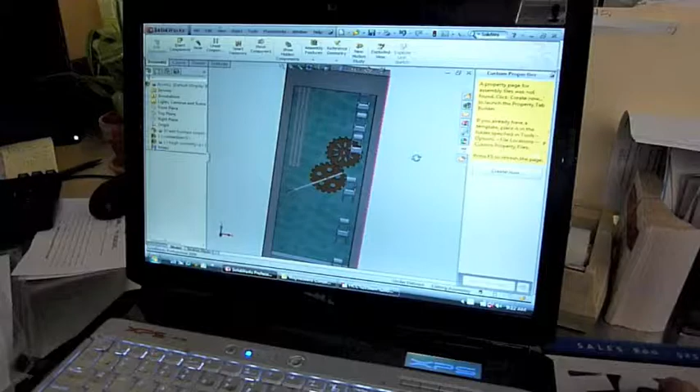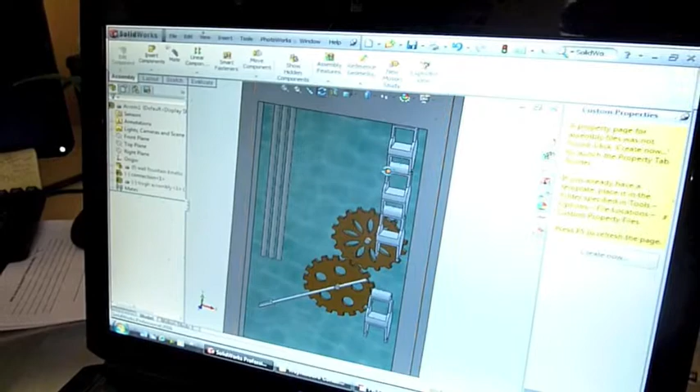Alright, so this piece right here will be flowing water in a linear form. What they'll be doing is filling up a canister that's attached to a counterweight on this shaft, which is spring-loaded in here. That will turn these gears, and the gears will then have this piece up here that will actually be water troughs rolling down constantly, smaller than what you see here, scaled to size. That will be kind of a conveyor.

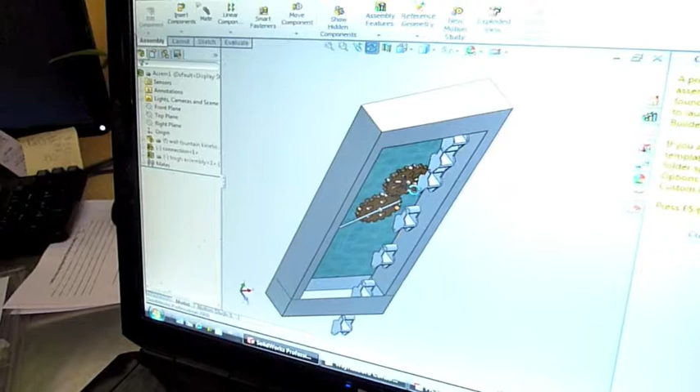And as the water's coming here and the counterweight's coming off of this piece here, it'd be moving these pieces slowly up and down as they're filling with water the whole time. They're filling with water because they're basically going to be dunking in, coming back up with it. And as they come up, they're going to pass this gear and counterweight, letting it move and catch up.

So the rod with the water coming down will be working in tandem with these pieces here, letting it flow without any other movement. It'll just be the water weight working it all together. So the water's driving it. Yeah, the water will drive everything.

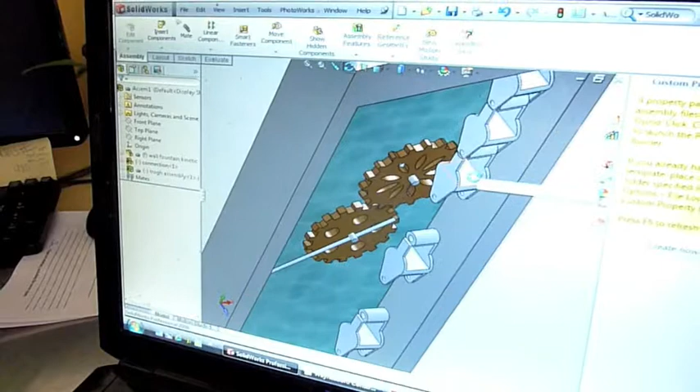Where does the water first enter through the rods? These pieces right here, that's where the water's coming into the system. It will actually pick up water from down at the bottom trough, and it'll come out with the water in it. And as they go up, they will.

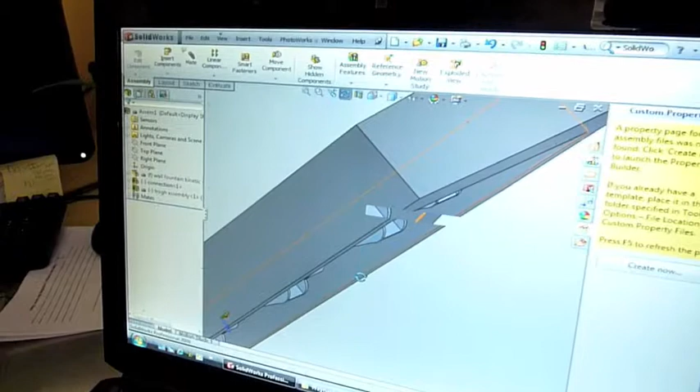Let's see if we can match it. See if it'll move, but you can't really see. Well, it will attach to a piece that's on this gear. And as it goes up, they're constantly going to be moving it, and this is on a spring.

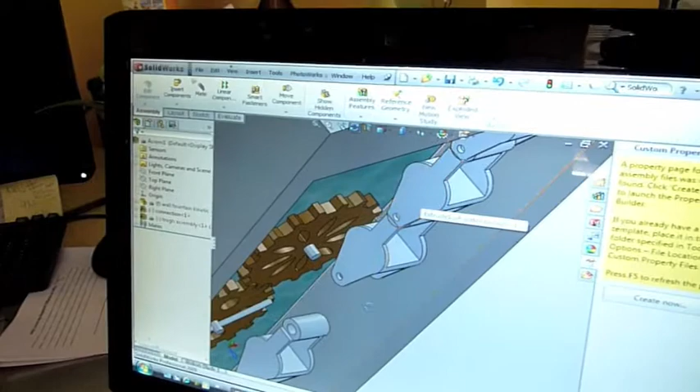So the spring loads up with tension and water weight on the other side, then it'll push it down. That will then make these things jolt and have them stop the other way, and then the water weight will keep it moving. So you'll have movement up and then movement back down.

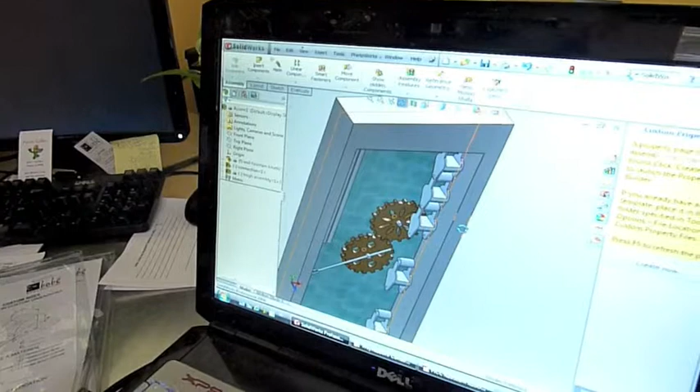As these pieces here are running in a loop, and they come back up filled with water and their water weight, they're going to be run by this gear, a separate pinion gear that's continually running this off of the weight here and spring loaded. Depending on how it needs to work in tandem with the weight and the mechanics of it, I might add a DC stepper motor to the back of that gear, and that will basically start it up and get it going, and then the water weight should carry it along.

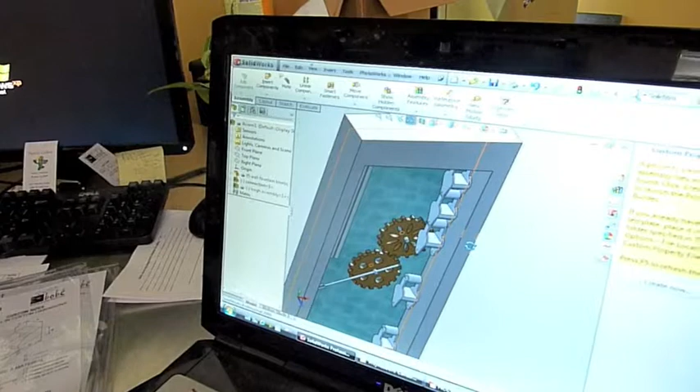If the water weight doesn't carry it along, it'll be a continuous running small stepper motor. You won't hear it, it won't do anything noticeable. It'll still give the appearance of total kinetic motion, even where it really can't be done on its own, but it'll have the appearance of being done. So everything will be driven by water, water will run through it and do everything, giving the appearance of doing everything, but a small stepper motor might be what gets it over the edge and lets it actually do it.

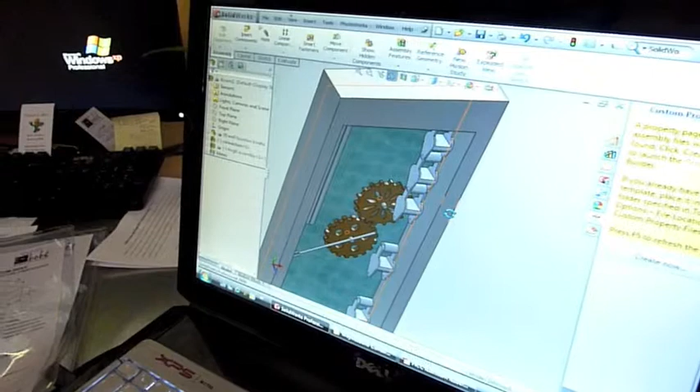Right, otherwise it'd be a perpetual motion machine. Yeah, which then we would get on the news and a Nobel Prize. Yeah, create energy. Cool. So that's it, you know, and whatever else they might want, or ideas or anything like that, you can figure anything out like that. Okay.

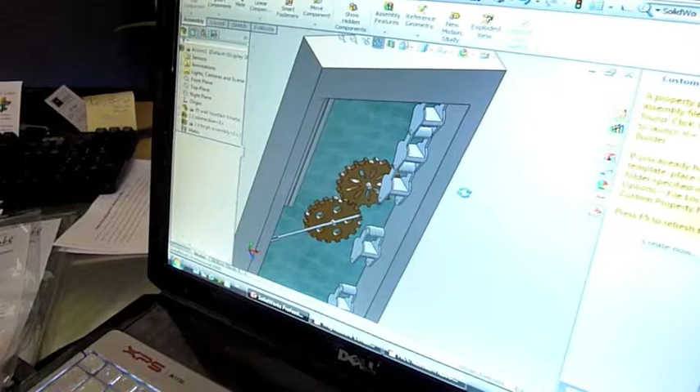Yeah, okay cool. So these gears, there's links. I mean, there's some of the links that aren't shown. I assume there's like a link here that's not shown. There's a link here that's not shown. They're connecting, and there's links down the other side. Yeah, it'd be double linked.

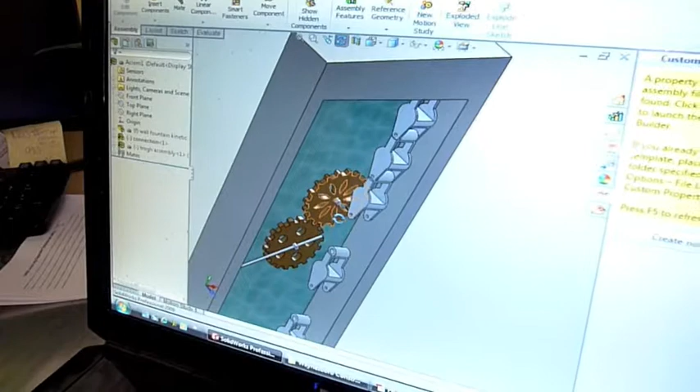It's like a bicycle chain? Yeah, it's basically like a bicycle chain. You double link and you'd see all the links together, but you're not going to see it right now because it's not letting the memory pull up every single part of it. Just because it's going to be too much for the computer since it's a laptop. But yeah, it would go all the way around.

Go ahead and rotate it around. Yeah, see it's not even catching up to it. Oh yeah, delayed. Yeah, you need a mainframe.

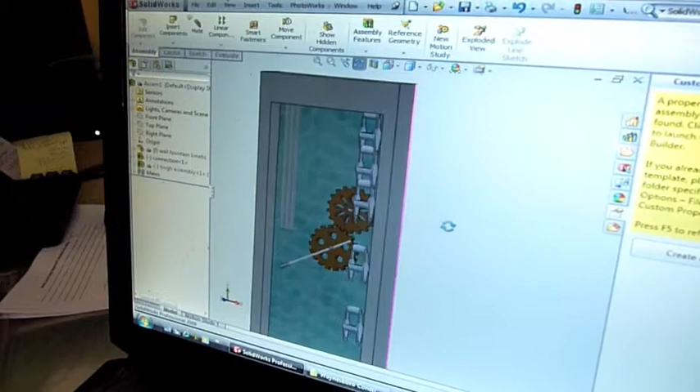So it's a pretty self-contained unit then. Yeah, it'll all be self-contained. As far as how it fits in the space, it just fits on that wall.

The sides, what do you think the sides and the face are as far as a finish? I would think satin stainless. These would be a satin finish, bronze, fully TIG welded gears. Yeah, they're just all custom.

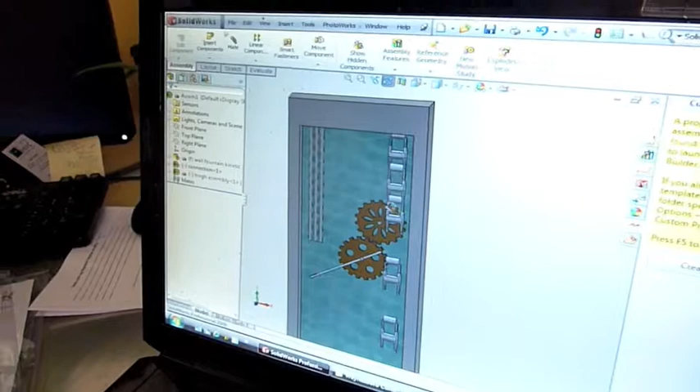And the back you were thinking is? I'm thinking stainless or a type of anodized aluminum to have the appearance of magnesium with a piece of glass over it. That way if we light it from the bottom, we could send the light through the glass and it would reflect off the magnesium look, and it'd give a lot of dynamic and depth to it.

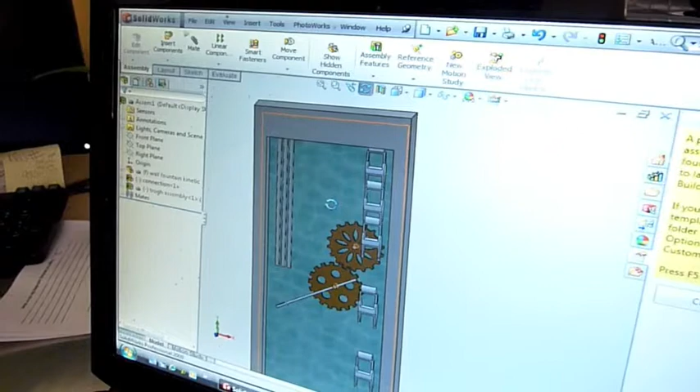Cool, do that. So the magnesium is just a darker... Yeah, it's basically like an aluminum we take and we dip it, and that'll give it kind of an anodized brown, kind of an off-brown bronze color. Okay, some shine to it. Sweet. Yeah, it looked nice.